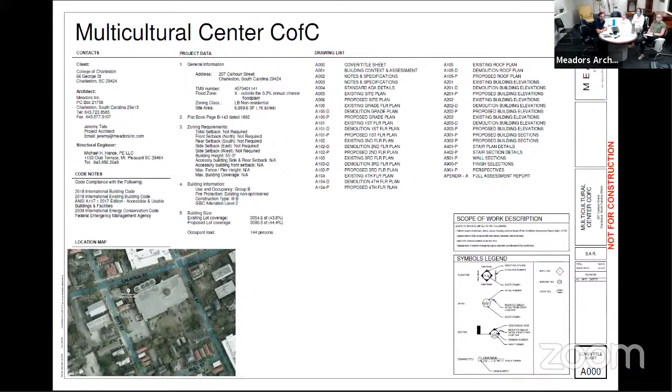Okay, can y'all hear us? Yes, we can. Great. So I'm Jeremy Tate, and I'm joined by Abby Gentry and Brittany Smith from Meadors. Thank you for this opportunity to present this project. Kim, if you could advance the slide, please. And keep going. So we'll start here. As Kim said, the structure was built in 1817, and it remained a residence, including a parsonage, up until the 1960s. Next slide, please.

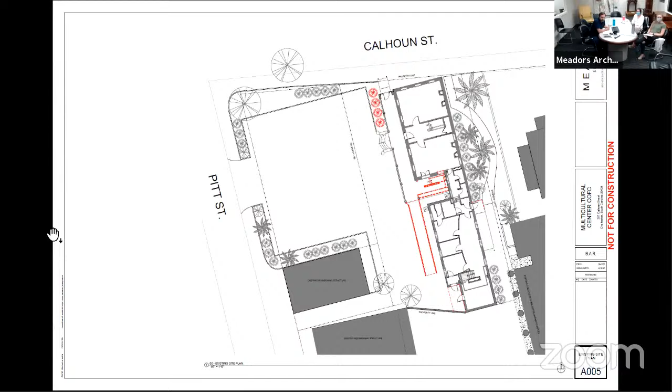Let's just keep going. Next slide. Next. Next. And next. One more. Okay, so the majority of what we are discussing for this presentation today has to do with accessibility and egress improvements to the facility.

As was stated, we have performed a complete conditions assessment. We will correct deficiencies due to lack of maintenance, deferred maintenance on the structure. But the things I wanted to bring to your attention are the improvements to the ADA and egress. So on the east side of the property, which would be the bottom of the plan, there is a current ADA concrete ramp.

It does not have proper railings on either side, so we will be bringing proper guards and railings to that ramp. On Calhoun Street, there are a series of stairs that come up into the Piazza entrance, and they do not contain any handrails for safe access to that Piazza. We'll be proposing to bring guards and rails to that.

And then from the parking lot on the west, which will be the top of the plan onto the Piazza, those curved cheek walls, we are proposing to add guards and rails to that for proper accessibility, keeping the center rail intact. Now, on those three elements, there is a detail sheet we'll get to later, but it's a standard Julius Blum cap with half-inch by half-inch painted steel pickets and a bottom rail. So a very simple railing design.

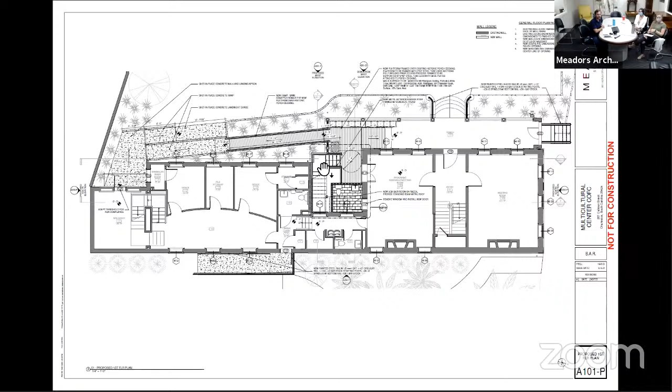And then the new stair would spring up from the western edge here that you see at the top of the page, and as it comes up towards the east, it'll land on the second floor, and it'll follow that same pattern all the way up to the fourth floor. We can quickly advance through the next slide.

Only thing I'm going to touch on here is that as the existing stair progresses vertically, the historic fabric of the second floor Piazza and the roof of the Piazza - it does not exist in its current configuration and hasn't since the mid-1970s. And what it's supported on is not a historic part of the Piazza currently; it's from the 1975 renovation project. So with the placement of this stair, we're not disturbing any historic fabric of the Piazza itself.

This is how it wraps up to the second floor. We do propose at this floor to reconstruct the Piazza flooring and use tongue and groove porch boards sloped to kind of restore that section, and then utilize it for the stairs going up and down.

So then it will reach through the same path up to the third level. And at the third level, the landing will exist behind the Piazza roof that you see illustrated on the top of the page.

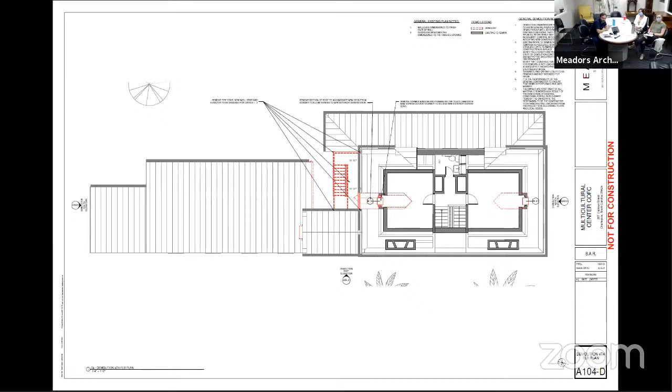It might be better to look at the roof plan next. As this will travel up to the fourth floor, which it currently does not, we're proposing removing a section of the roof south of the existing dormer to create a well for the dormer window to be removed and a door placed. The roof is a copper roof from the 1975-76 renovation. We would reclad that well with copper, and then extend the stair and landing into that well to connect to the door.

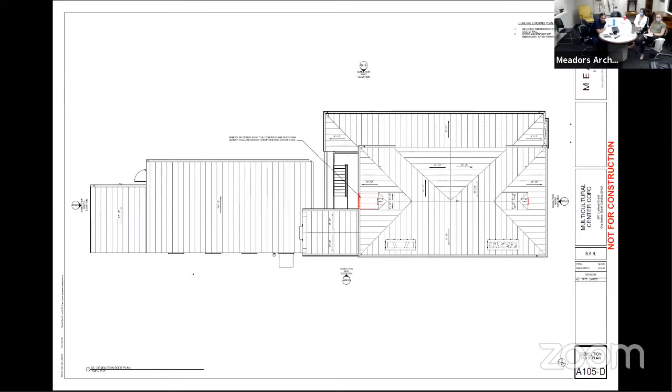This would show how that connects in at that location.

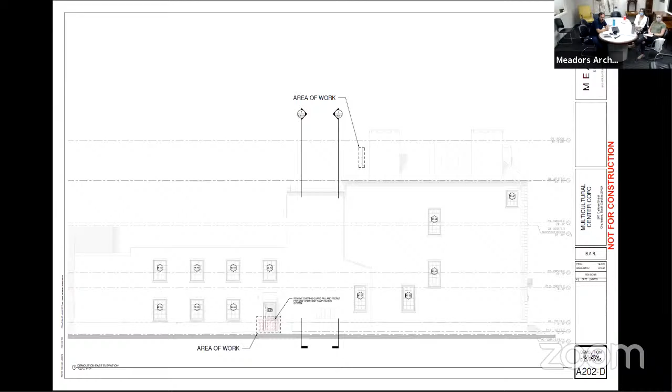It would be slightly visible from the east, but only in a 2D view. The library for the college does block part of this, and from a perspective view it would be hard to see part of this from the east.

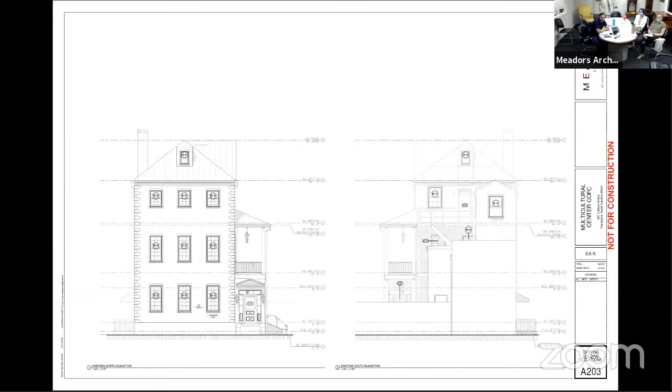It will be visible from the south if you're in the parking lot for the library. You'll see a good portion of it here. This is the proposed view, showing the change up to the door to the dormer.

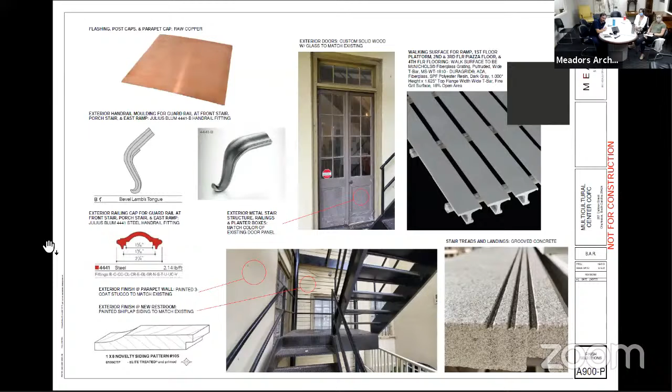And then perspectives. The only thing I'm going to mention in closing is that because of the level of alteration being performed on this building, we're at a level 2 alteration in the IEBC. Per section 805, stories with one exit or access to one exit at the third story above grade plane and higher are not permitted by the code, which is why we're bringing this to you in order to comply with the code and keep the fourth floor habitable for the College of Charleston. We have to have this stair as a second egress up to the dormer.

Thank you, Mr. Tate. Do my fellow board members have any questions for the applicant? I've got a quick one.

Jeremy, did you give any thought to maybe limiting the square footage in that attic space to have it be designated as a mezzanine, or somehow work with the code to avoid having to take that stair up in such a dramatic way?

Yeah, so the code is pretty clear that there's only 4 occupants up there. So when you run the code as a business, because this is College of Charleston, the square footage equals 4 occupants, and there's a restroom up there too. So by the code, I have to treat that as a habitable floor. It's a 4th floor, and I have to have that second stair out.

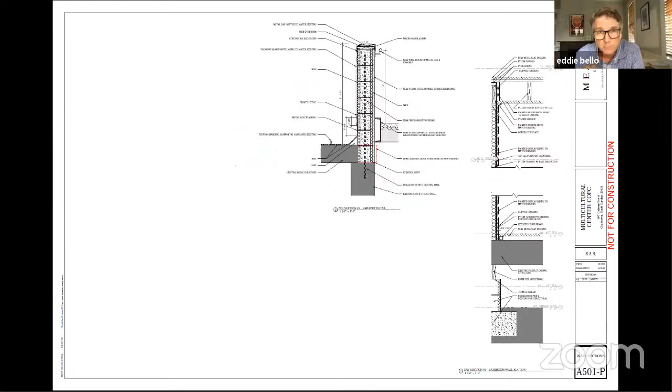Can you go to, well, two quick questions. One, what is the height above grade of the first floor piazza? Is it over 30 inches?

The first floor level is above 30 inches, but there's a step down to the piazza, and the piazza is close to 30 inches. I was just wondering if you had to have horizontal pickets at all.

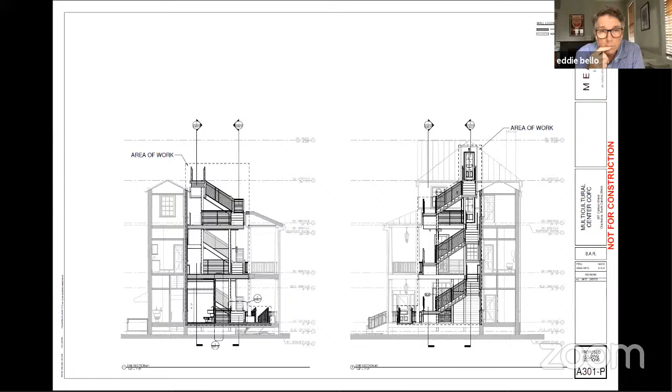Can you go to the enlarged stair plans? This will be the last question, I'm not trying to grill you, I'm just trying to understand it. If you have a floor plan that shows the stair - they're all four on one page coming up. Yeah, that's what I want to see.

I was just going to ask if you looked at - go one more, the floor below would be good. Well, not that one, you had one that showed all this. All right, just stop here.

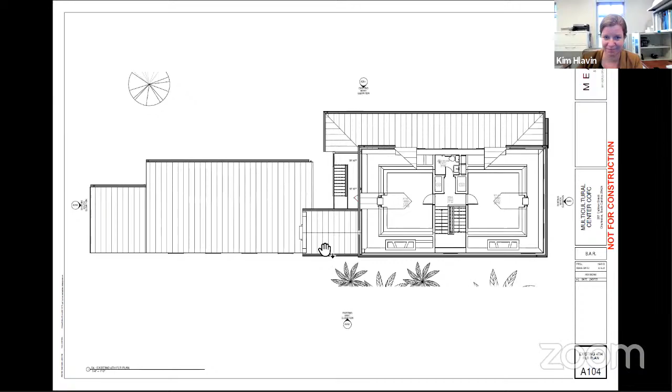This is good. Okay, so right where your hand is, did you look at it - it looks to me like if you took a couple of risers off the south, or a couple of treads off the south, and transferred them over to the right, then the whole stair could go down eastward so it wouldn't be beyond the rear building. You follow what I'm saying? That little corner sticking out - you've got the stair on two sides of it, but three sides, but not the fourth.

And if you put more risers on that side, then the whole stair gets smaller - well, it does in that location. This is at the third level going down to the second level. The height I have to get from first to second has dictated that run while trying to maintain it.

So is this still the third floor? Yeah, you go back. See, is this second floor? This is second floor, yeah.

There's a number of things to factor in. The reason why this stair is starting where it's starting at the second floor and then going down to the first floor is so I have enough height to do that bathroom underneath it. Does that make sense? It does - I figured it was a little more complicated than I was thinking.

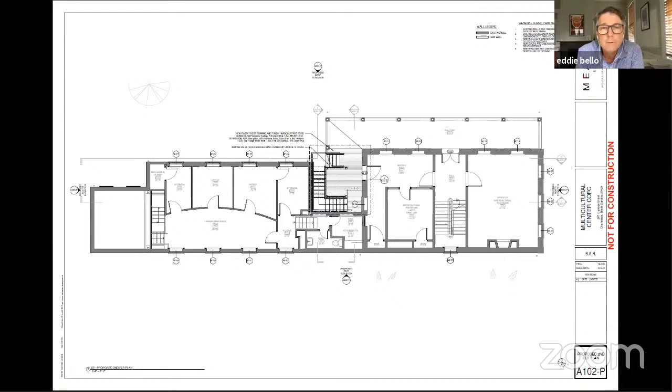It just seems like you've got a little bit more run than you're using. I mean, we're getting into the comments a little bit, but obviously tying into that top floor is what's most visible - that's the big issue. And then also, if you could somehow push it down, but maybe you can't.

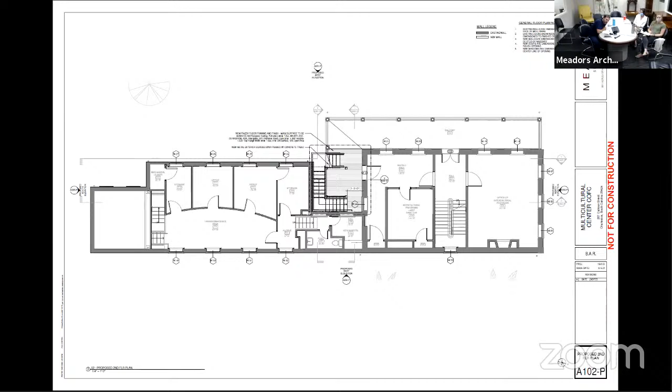I do believe that from the third to the fourth floor, I could probably start the stairs down faster since I'll be getting to that level anyway. That would lower the visibility some. It's a tough one - I just was asking if you looked at it. Sounds like y'all looked at it, so thank you.

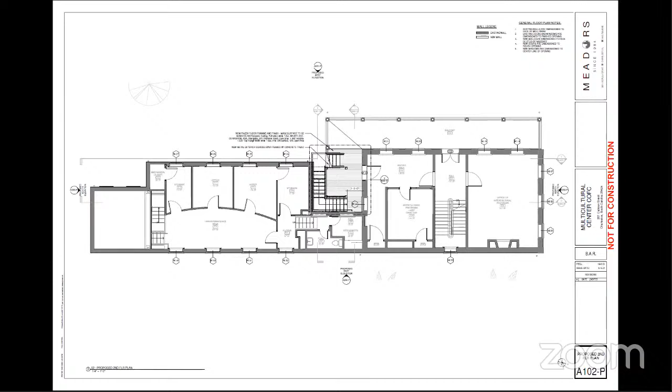This is April Wood, Historic Charleston Foundation. HCF has reviewed the application for preliminary approval for the renovation of the building, including repairs to the windows, doors, stucco, flashing, and roof, and the addition of an exterior ADA access and egress to the fourth floor, and we thank the applicant for their time walking through the application with us. Overall, we are generally supportive of the work. We do have concern about the additional egress to the fourth floor. The alteration removes historic fabric at the dormer and roof, and the additional stair is also highly visible from Pitt Street. While we understand the code requirements for the fire stair, we are concerned about the significant and visible alterations to accommodate the egress stair from the third to the fourth floor, to be on the record. We hope a more sensitive solution can be found. Thank you.

Thank you, April. Kim, do we have anyone else speaking from the public? We have Virginia Swift with Preservation Society. Virginia, you're on mute. Hi, good evening, can you all hear me? Hi there. My colleagues weren't able to make it, so I will be submitting comments for the Preservation Society - my name is Virginia Swift.

The Preservation Society appreciates the applicant reaching out to us on this request. This is an early and significant Category 2 building, and we are encouraged by this proposal to conduct much needed maintenance and repairs to prolong the life of the building.

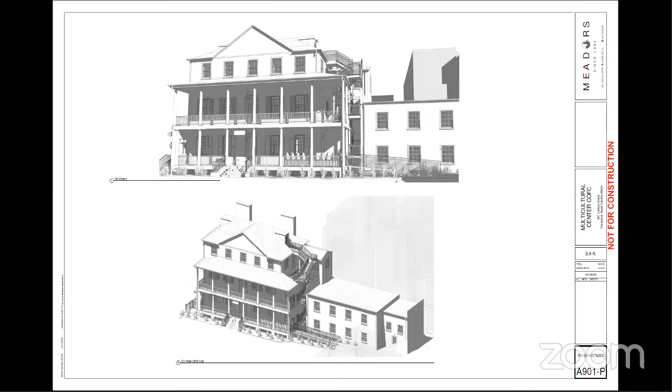However, we are not supportive of the introduction of an exterior egress stair that extends up to the fourth floor. As proposed, this structure will be highly visible and intrusive to existing historic fabric. We ask that alternative configurations be explored that are more sensitive to the form and fabric of the historic building, and in particular, the Piazza. The Preservation Society is sympathetic to the programmatic needs of the college and remains optimistic that a compromise can be reached that facilitates project objectives as well as preservation of the significant historic building. Thank you.

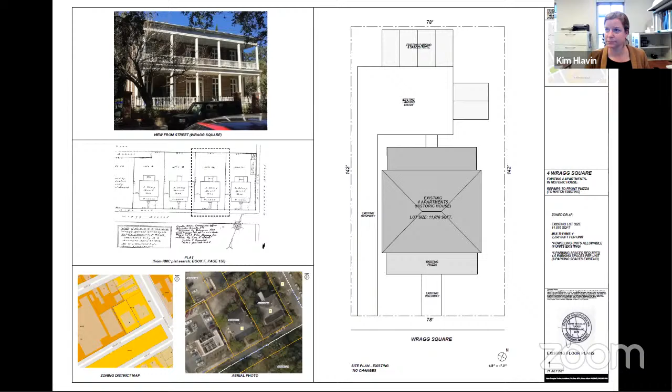Got him. Mr. Tucker, I see you, but you're on mute. Okay, sorry about that. This is Johnny Tucker, the architect. Had a little confusion there. So I'm representing the owner of the house, Edouard DeFranc.

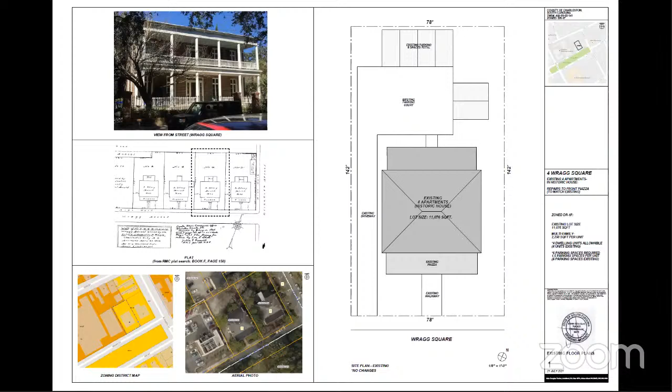So this is, you probably know these houses. These were part of the 7 days of the week that were built for the Aiken-Rhett house. This is the second house to the west of Elizabeth Street. Existing, it's a 4 unit apartment building. The owner actually occupies the top 2 units. If you could go to the next slide, please.

And it's masonry with a stone flooring. It's sort of interesting that the stone is matched from the walkway. All of it is in pretty dire condition. We're going to obviously remove that pretty horrible metal railing. Fortunately, we don't need railing, so we'll eliminate that completely. Next slide, please.

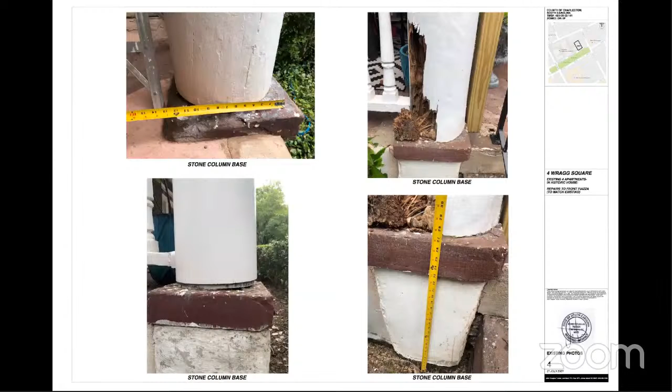Next slide, please. So close up of some other column conditions. I like that lower left-hand corner photograph, you can see that is most definitely not a historic wood column. Some of the others, like this one in the upper right, appear to be. I don't have a full inventory of each column, but we feel like a majority, if not all of the columns at the first floor piazza are probably in a pretty dire condition.

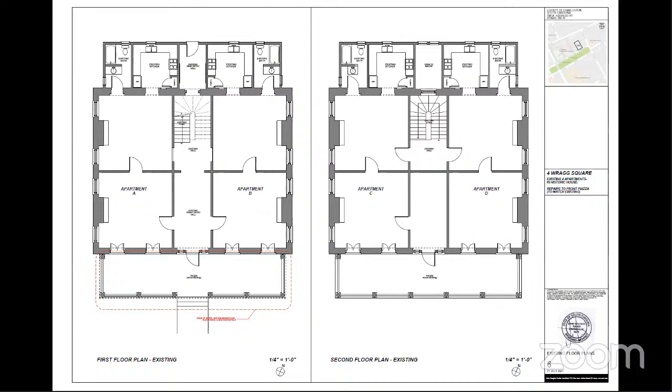So the area in question, again, first floor piazza. Ideally, what we're hoping to do is just replace the existing foundation with a new one, but since we're having all the settlement of the piazza, with a new concrete foundation and CMU, but treat it so that the finished view will be stuccoed and exactly identical in appearance, except for, and you can see it on the upper details.

So the problem with the existing flooring is it does not extend beyond the stucco, which I pointed out before. So the proposal is to, with the new stone flooring, have the floor extend approximately 3/4 inches over the face of the stucco, which will allow for a drip edge.

And obviously we maintain the stone plinths or bases for all the columns, and maintain as much of the railing and pickets, ideally all of them. With replacing columns, obviously they'd probably have to be removed, but replaced. So really, the following sheets are just showing the structural drawings of how we would do this, shown in my details as well. The block walls and the concrete slab will be the substrate for the new stone flooring.

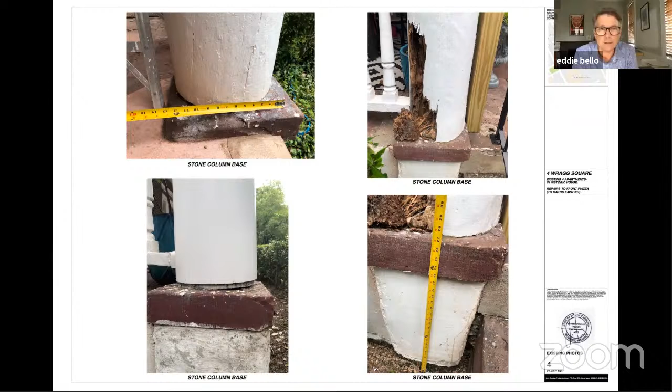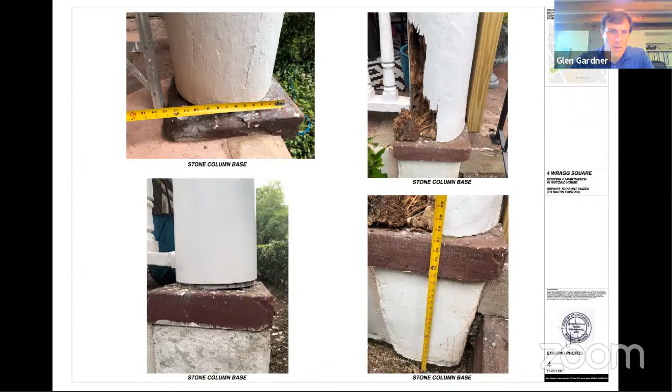Go ahead, Glenn. Sorry, just one clarification, Johnny—I think you kind of said it verbally, but on sheet 7, your detail, the pickets are just sort of drawn as generic. I'm just verifying that there are notes that those would be the existing pickets reused, and then replaced only to match that profile as needed. Yeah, sorry, that was me in a rush. No, that's under the assumption we're not going to have to replace any of the pickets. I just did that as a placeholder, but the note is correct, and we would not be changing the picket profile.

Okay, hopefully not changing the pickets themselves—they look to be in pretty good condition from a look from the sidewalk. The entire piazza above the stone bases, and of course the columns, are in trouble because of wicking, but the pickets upward on the second floor piazza are in surprisingly pristine condition.

Thank you. I had one question, I guess it might relate a little to Eddie's question about the condition at the column bases. Do you have any sense of how old, how original this current paving is, this condition is? That's a good question, Julia.

I should have included photographs of number 2 Wragg Square. It's got masonry too, but some sort of nebulous conditions also. Yeah, it actually looks like they poured a topping slab over the condition. I probably should have included that just so you could see that condition. Unfortunately I've only found one photograph—I can't even remember the source—but it's showing like 4 of the days of the week. The last 2 are just, I think, from the 50s, and none of them have any—I can't tell. I mean, I see the little relief where the column bases are proud of the main foundation wall, but no condition, I can't see any detail on how it's treated.

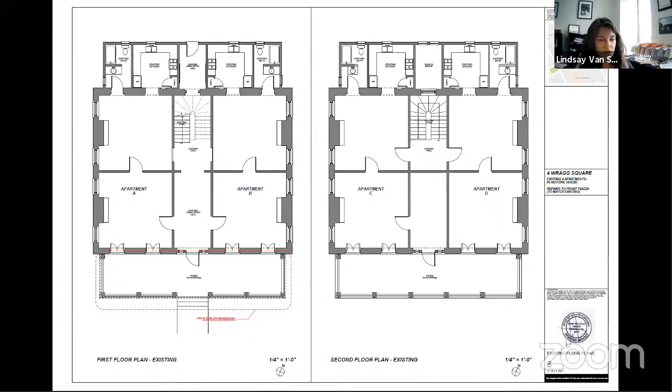Thank you, Kim. Mr. Tucker, did you want to clarify or respond to anything raised by the public or staff comments? No, thank you. All right, let's move into board discussion and a vote.

I would say I live right near this application, and I've looked in the past, especially as the school to the west of this home had some proposals in recent years. I have never seen any photographs of the homes that were unfortunately lost there, or the two homes that remain, having a piazza floor that was not masonry. It's so atypical, it's just downright weird, to be honest, but I've never seen anything that proved otherwise.

They seem to have both been very similarly built at some point, whether it's original to the construction or not. I think that the brownstone flooring is historic at this point, but I'm in complete support of what has been requested. I think that little bit of a drip edge is reasonable to request, maybe minimize it a tad. But I think having the face of that stucco come up flush with the brownstone, especially with that brownstone not being perfectly even on the edge, is a reasonable ask. I think the owner of this property has been a good steward of historic properties in the past, and I'm glad they're trying to keep this piazza upright.

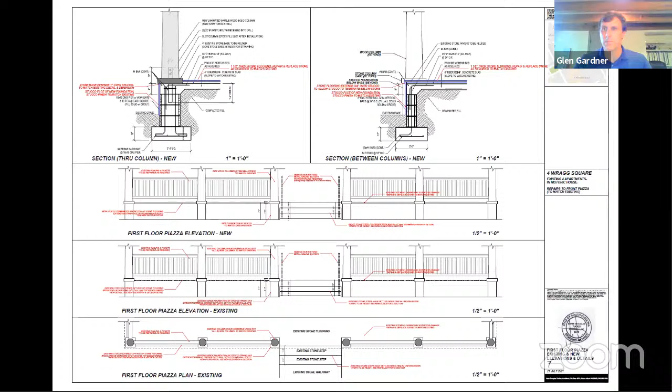All right, do we have a second? Motion on the floor for final approval, with a board comment to coordinate with staff on stone replacement if required. Glen, did I hear a second from you? I think Eddie did. Yeah, it was me. All right, Eddie, second. I'll put it to a vote.

Fillmore, yay in favor. Glen, yay in favor. Julia, yay in favor. Eddie, yay in favor. The chair votes with the majority and the motion passes unanimously.

Thank you, Mr. Tucker. Thank you. You're on agenda item number 4, 58 Hanover Street. Kim? Don't go anywhere, Johnny. I'm here. 58 Hanover Street is requesting preliminary approval for new construction.

It's in the East Side neighborhood in the Old City District. Here's an aerial to familiarize yourself. It's just north of Columbus on the east side, and you can see the vacant lot here. This is from Aiken Street, looking north on Hanover, and looking south. With that said, I'll turn it over to Johnny.

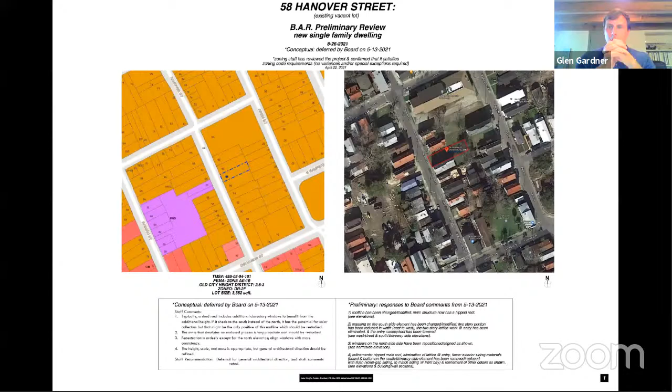Thank you, Kim. So again, Johnny Tucker, architect. I was in front of the board in May, and we were deferred. I will address the comments and our response to those when we get to the elevations, because that's obviously where the changes occurred. So next slide, please.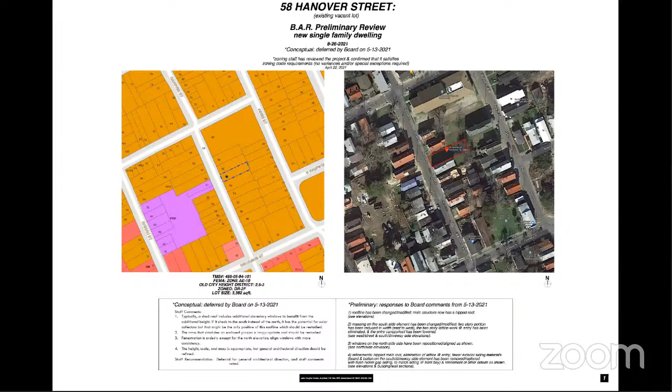Next. So just more site photos. Next, please.

And then across the street, the red dotted line is the massing of the proposed structure.

Okay, so the proposed changes, I'll get into in a little more detail, but this is where you can sort of see the main change. So the conceptual design that was brought in May, there was a lot of unease with the shed roof. So we have restudied that and we're proposing a hip roof. And we've also sort of reworked the other elements. I'll get into those when we get to the larger elevation.

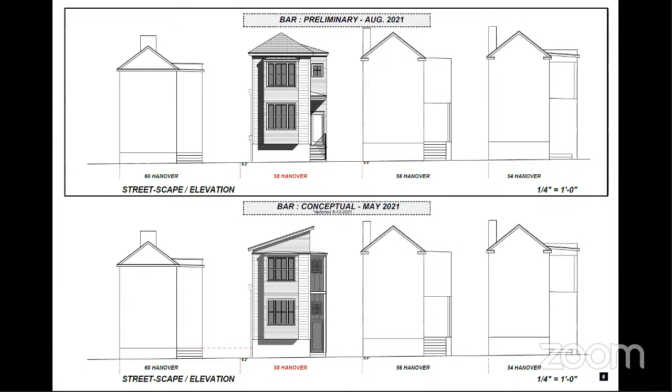So I'll go through these pretty quickly. These are just the new floor plans, which are really not much different than the previous floor plans.

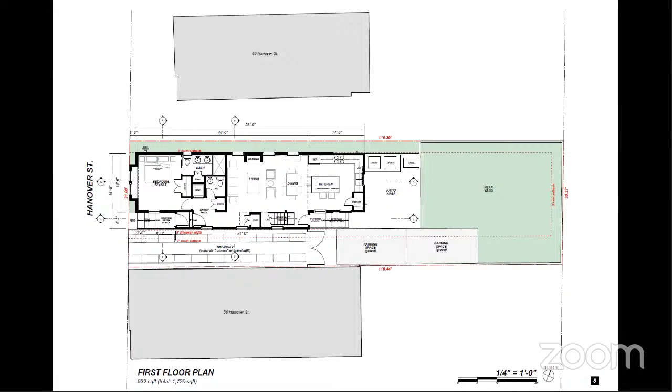So the floor plans are almost identical. There is a reworking of the front entry area, which you'll see in the elevations coming up.

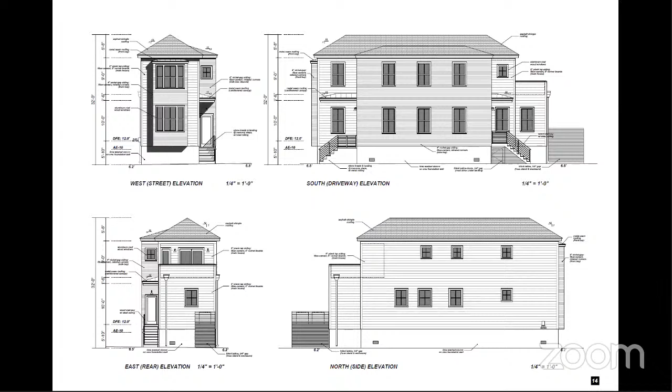Okay, so those are the four proposed elevations. And I guess go to the next one, and I'll go over the changes that were made relative to the staff comments.

Okay, so the first comment that I think I've already touched on was the shed roof. I feel like the hipped roof is a much more refined solution. What we've done is the side element on the south side, I've let that roof line engage so that has a hipped roof as well. You can sort of see that at the top west elevation, obviously the south elevation.

And then another element that we have changed, or revisited completely, was the trellised piazza entry element on the lower south elevation that we brought in May. I did a lot of study about that, and I just decided it was causing a little more grief than it was rewarding. So we've decided to simplify that.

And by doing so, we've lowered the front entry roof line to another hipped element that has metal roofing, which is sort of nice. And the front bay element is very similar to the previous proposal, but refined and also with the metal roofing.

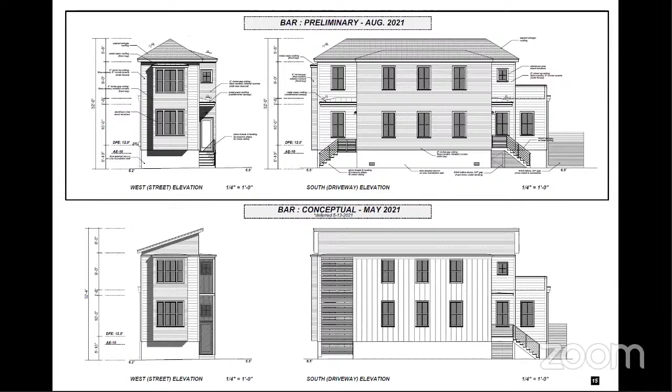Next slide, please. And then I'll go through these real quick, half inch scale elevations. We've also, I forgot about this too, reduced the number of siding materials, and I'll get to that.

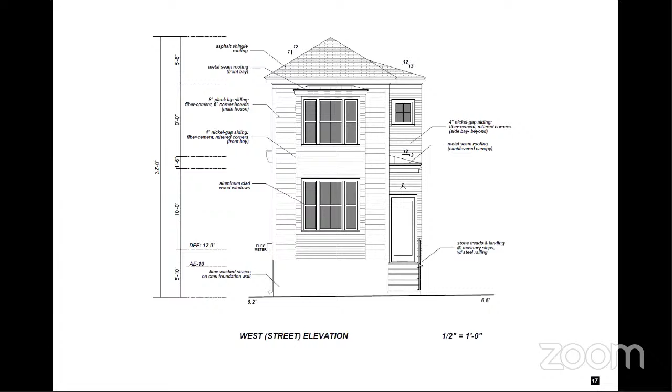I believe, yeah, we had a vertical board and batten on the side element, so we actually had three main building materials: the lap, the ship lap, and this board and batten. So we've reduced that.

And then so now we just have the two elements, which you'll see in the upcoming image. Next, please.

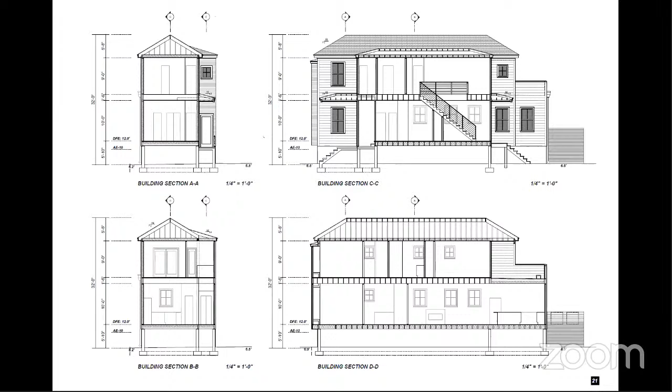It's a simple house on the east side, simple materials, but I think with the mitered corners and some of the simple materials, the cove molding gives a nice shadow line and profile, but it's a quieter profile. Next, please. Okay, that's perfect, almost done. Next, please.

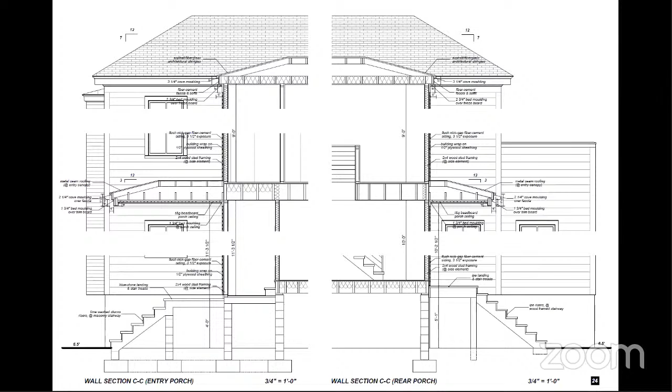And there's the engaged roof piazza in the back. Sorry, not piazza—roof terrace. We talked about it in the last meeting. Next, please.

And next. Oh yeah, here's the building materials to remind everybody. Just simple—let me put my glasses on. 5/8 inch plank lap siding for the main body of the house. The flush nickel gap with mitered corners for the front element and side element. Architectural shingles for the main roof element. 5V crimp for the metal areas, lime wash stucco, and then the steel railing at the front entry. Next slide, and then I'm done.

Just the streetscape one more time. So thank you, Mr. Tucker. Do my fellow board members have any questions for Mr. Tucker?

I do not. All right.

Kim, do we have any public comment? I did not see any in the Dropbox. Good question—we don't have any public comment.

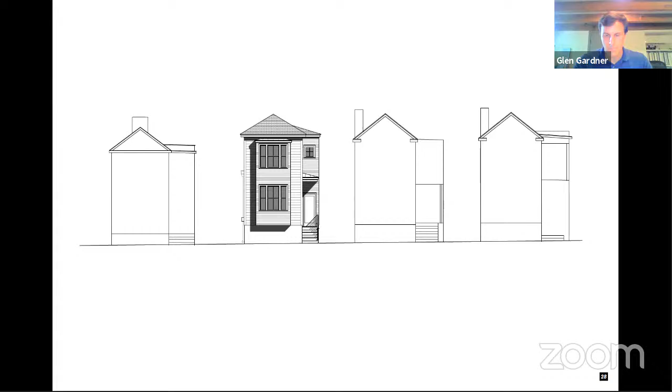All right, so we had a motion on the floor for final approval by Eddie, and a second by Julia. I will put it to a vote. Fillmore, yay in favor. Glen, yay in favor. Eddie, yay in favor. Julia, yay in favor. Chair votes as majority, and the motion passes unanimously.

Thank you, Mr. Tucker—a big thank you for you. Thanks a lot.

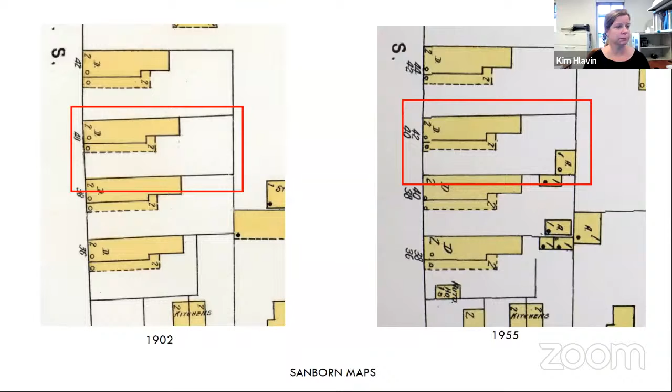Here are some existing site images, looking north on Legare and south, and some Sanborn maps from 1902 and 1955. With that said, I'll turn it over to Ms. Jennings, and the floor is yours whenever you're ready.

Ms. Jennings, I can see you, but I can't hear you. Does she have an audio problem? Is she dialed in and also on video? Kim, you're muted. She's raised her hand, but I can't do anything else. Ms. Jennings, have you tried speaking? What was that, Lindsay? I didn't know if she tried speaking. Can she just call? If we're having audio problems, we can put this on the table and go to the next one until we figure this out.

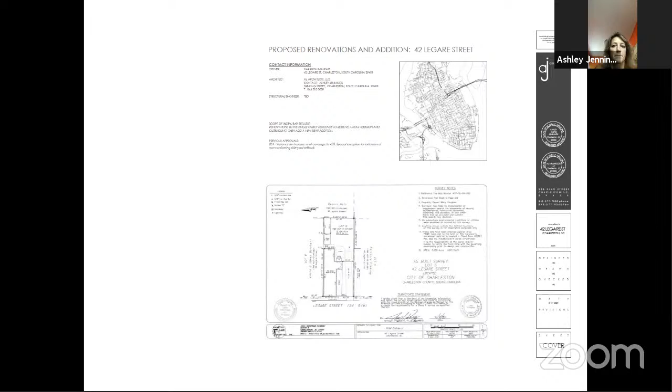It might not be working again. Can you hear us, Ashley? I can hear you. Can you hear me? Yes, we can, you can go ahead. Okay, great. Ready? Yes, you have the floor. Ashley, you have the floor if you're ready. Okay, am I just going to present it, or is Kim going to introduce the project? Oh, I'm sorry, she did already. I think you missed it. Okay, sorry, I was in the process of trying to get back on. Okay, so my apologies, I don't know what happened with my computer.

This is an existing single house. It's been a family home for about a generation, and it was recently sold. The new owner would like to make some repairs and renovations. The family lived there and enjoyed the house for a long time, and it needs some renovations now.

Okay, next slide please. Okay, sorry about that. So on the site plan, you can see that this is the addition that's there now that we're proposing to remove.

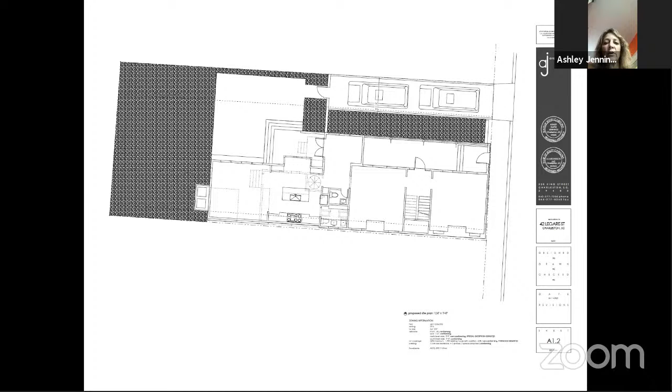Next slide please. And the proposal is to... sorry. So here you can see the proposal for the first floor being a kitchen and a living space. Next slide please.

On the second floor, we're looking at a master suite. As y'all know, with every single house there's a challenge to access rooms. So the idea is to ever so slightly modify the rear room to create a hallway and then make a master suite on the back of the house. Next slide please.

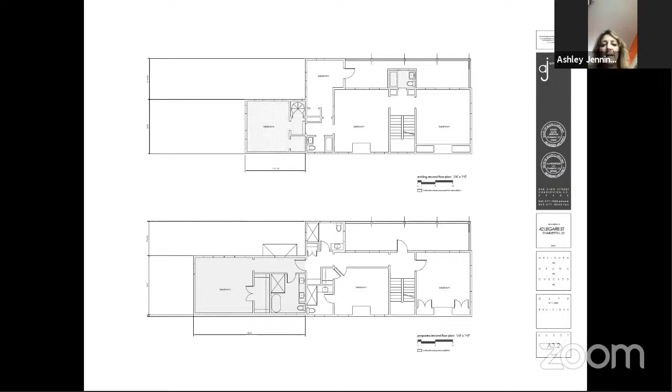So there's very minimal changes to the street elevation except for the removal of that second floor infill. Next slide.

On the south side, the idea is to use an existing pause in the building where the piazza at one point returned and create the addition behind that pause, opening that side up for some glass and a view of the yard itself. Next slide, please.

And here you can see that break in the facade as we propose with the new addition. Next slide, please.

Ashley, I think you're frozen. Ashley, can you hear us? I can hear you, can you hear me? Yes, we can hear you.

And then the idea is to create a very simple addition in the back. And that's all I needed to say.

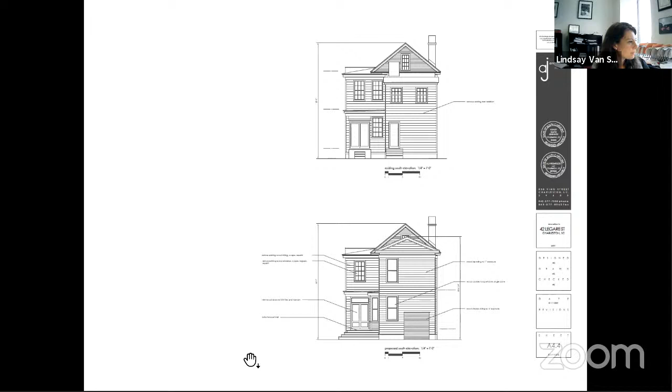Thank you, thanks Ashley. Do we have any board questions for the applicant? All right, Kim, do we have any public comment? We don't.

All right, if you will give us staff comments, please. Sure. We really appreciate the differentiation of materials and the separation of roof lines that delineate two very distinct building campaigns. Normally we'd recommend recessing the addition further on the driveway side and reducing the size of the openings to be more compatible with the primary house. However, the addition at the rear of the piazza conceals these elements. One other thing, we have approved the demolition request at the staff level, and staff is recommending conceptual approval with final details to staff.

Thank you, Kim. Ashley, did you want to clarify or respond to anything raised in the staff comments? No, thank you. All right, now I'll open it up for board discussion and a vote.

I agree, it seems reasonable and appropriate. And I just had one tiny suggestion where those stairs from the terrace sort of spill out toward the driveway. If you wanted to, you could kind of wrap those around toward the street and hopefully avoid a rail that would be required projecting out toward the driveway. You know what I mean? If you just sort of let them wrap around instead of the blunt end of them sticking out toward the driveway, then you could put a rail on the wall or avoid that awkward condition of the end of those steps, if that makes sense.

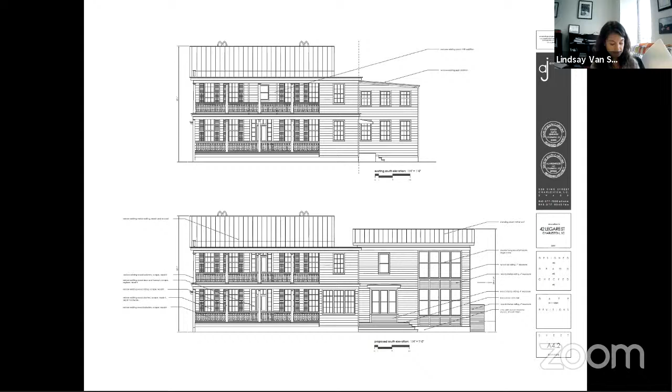Julia? Yay, in favor. Fillmore? Yay, in favor. Eddie? Yay, in favor. Glenn? Yay, in favor. Chair votes with the majority and the motion passes unanimously.

Thank you, Ms. Jennings. Thank y'all. Sorry for my technicals. Hope your dog's okay. It isn't too angry.

All right, moving on to agenda item number 6, 22 Savage Street. Kim, please give us an introduction. Thanks, Lindsay.

All right, 22 Savage Street is requesting conceptual approval for the new construction of a single-car garage. The building itself is a Category 4 in the Charleston neighborhood and was built sometime around 1890 in the Old and Historic District.

Whenever you're ready, you have the floor. Hi, this is Jenny Conlon. Bear with me, I have two Zooms running, so I'm getting a little confused. What we're trying to do is add a garage where a shed stood originally.

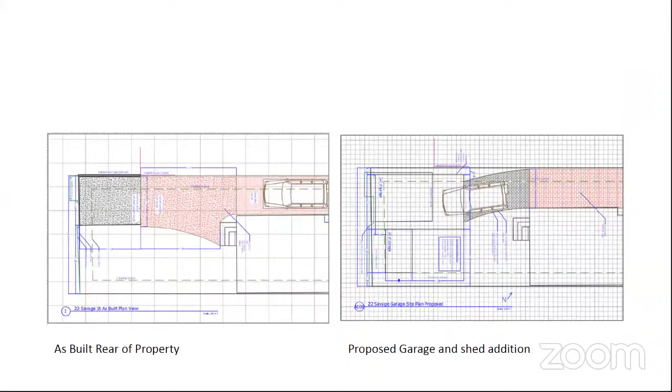Questions. Is there an image, and maybe I'm missing something, of the new building next to the existing building? Is it not visible? I'm confused about this application. There are elevations, I don't see where they are on here, but there were elevations. This was the only thing I had. Oh, in the Dropbox, Kim, there were elevations. There you go. I don't have any elevations of the existing house or a complete site plan. So correct.

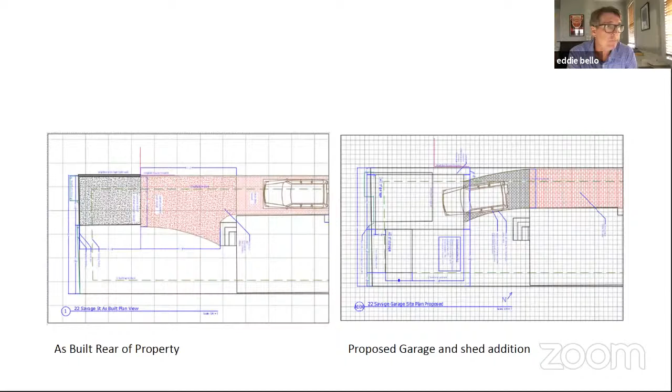Well, off the top of my head, my guess is a garage is probably okay, but it's really hard if I don't have a whole site plan to know where it's going. So it's hard to know what we're reviewing. I mean, again, it's probably fine, but I just don't feel super comfortable without a site plan to the street. There's one in here, I'm scrolling through her drawing now. And my guess is it's minimally visible, but I just think we need a real site plan.

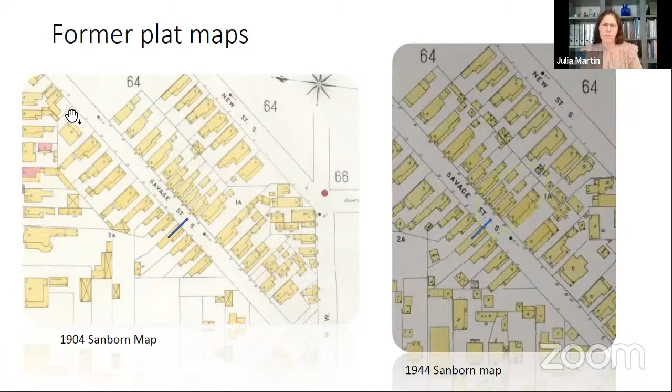Julia, to answer your question, it's in AE 11. Okay, we don't really know what the grade is or anything, but so whatever. Any other board questions at this time? All right, I'll move on to public comment.

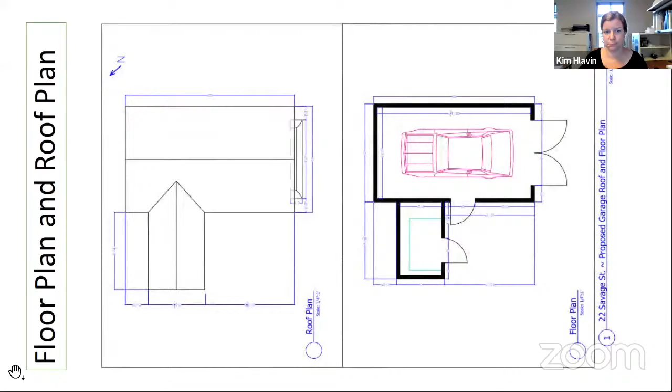Kim, do we have anyone speaking from the public? I don't see anything in Dropbox. We do not. All right, if you will give us city staff comments and recommendations, please.

The houses are very close together, which eliminates any line of sight except directly down the driveway. If it were to be visible, we would suggest expanding the garden shed portion of the garage to the rear to eliminate an awkward massing. Eliminate the boxed eaves. HardiePlank isn't appropriate as the Artisan line has been discontinued, so submit an appropriate replacement at final review, and also submit engineering drawings for final review. Otherwise, we are comfortable recommending conceptual approval with final details to staff.

Thank you, Kim. Ms. Conlon, did you want to respond or clarify anything raised in staff comments? Yes, I have been trying. This is, of course, my first submittal in quite some time, so I was trying to get some help with this, trying to get the packet together. I guess the staff is super busy, which I understand, I'm super busy too. So anyway, I've been requesting a review to make sure I have everything I need on this, and I've missed that site plan, so I apologize for that.

Thank you, Ms. Conlon. I'll open it up for board discussion and a vote at this time. I can start, and along the lines of where Eddie was going, I think there's a lot of unclear or missing information here. My inclination is that the height, scale, mass, and general architectural direction are okay, but currently the details, the site conditions, the flood zone, materials, and a lot of things are just sort of missing and nebulous. I'd be happy if staff wants to take it from here, but I just feel like they're going to need a lot of clarification before they can give a final approval. Yeah, that's all I got.

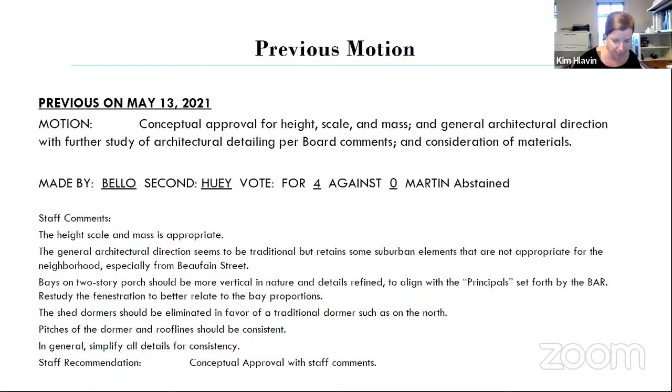Hey guys, can you hear me? You can. All right.

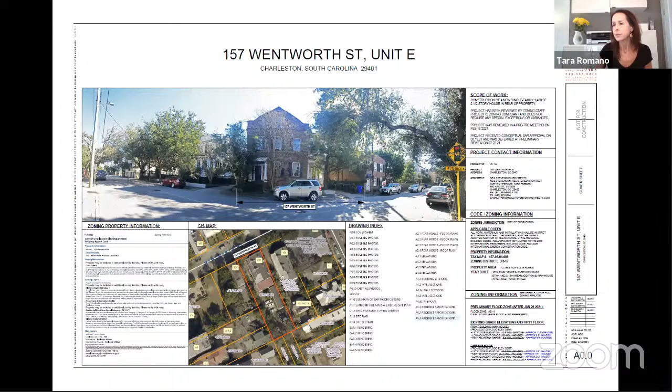Okay, so let's see. I'm going to try to run through some of these photographs quickly. You might remember this one. I guess you can go ahead and go to the next slide.

So 157 Wentworth Street is on the south side of Wentworth. There's the main building there, 1853, the carriage house behind it, and then there's a decent amount of space left in the rear of the lot. Next slide.

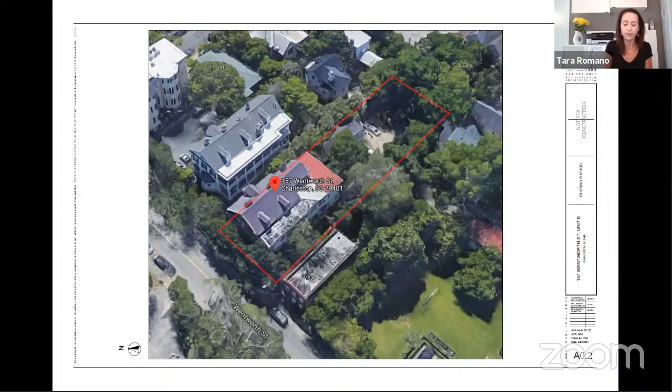Same there, that's looking in the other direction. You can see the empty space available in the back. Next slide.

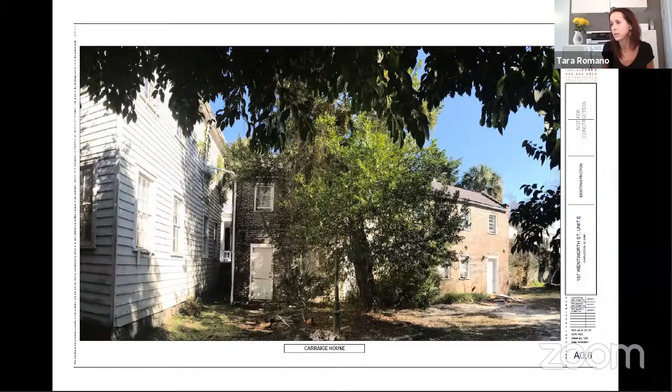And the carriage house behind it. The new structure is going to go behind this carriage house.

It's a view from the back looking forward. You can see the carriage house in the foreground and then the main house, which is 3 stories rising up in the back.

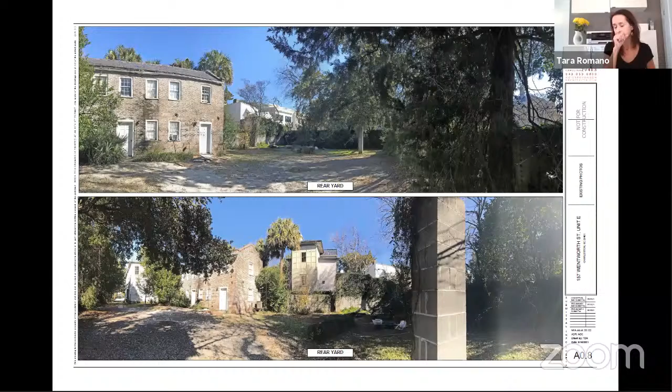And the rear yard area, that big clearing behind the carriage house, is where a new house will go. If you look at the picture on the bottom, the new house will be in alignment with the house you see in the back on that adjacent property. The new house will be smaller than that house.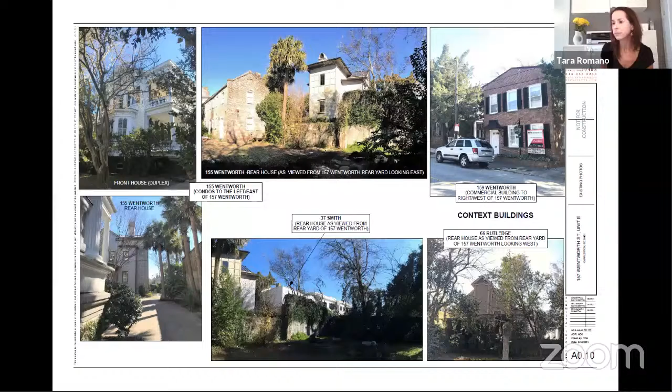The response is that the sloped columns were eliminated. Staff comment 2 noted other items giving the design a suburban feel: bulky trim, heavy columns, and extraneous trim on the dormers, to be refined by reducing or eliminating. Our response was we slimmed down the dormers to remove the extra trim. The window and gable trim was changed from 6 inches to 4 inches. The columns were slimmed down from 8 inches to 6 inches square, with top and bottom trim removed. The angled columns were straightened, cable rails changed back to clean line, square pickets and squared off rails, and the upper horizontal trim band was changed to a traditional gable trim line.

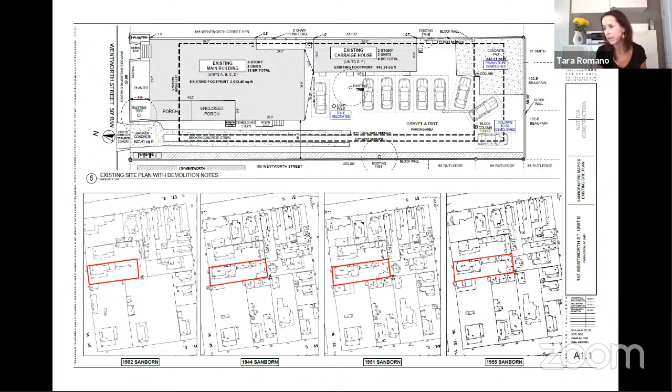Next slide. Romano, you've got about 2 minutes left. Man, she's so bad at that. I thought I was going fast.

Area plan is the same. You can see at the top, kind of mimicking the building above. Zoning is the same.

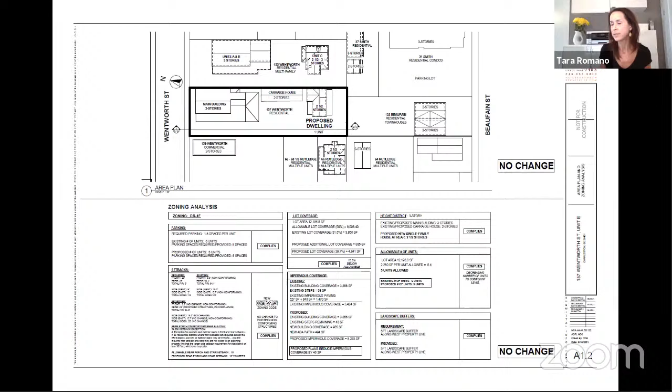Site sections: at the top is the previous, more contemporary looking building. At the bottom is the new one proposed. You can see the floor-to-floors that we reduced, and the 1 foot taken off the building.

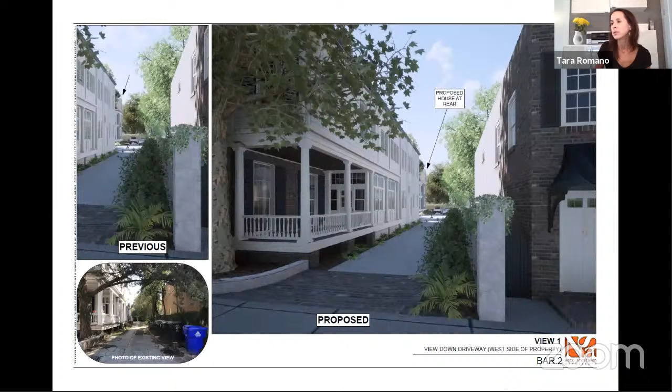This is the view from Wentworth Street.

View from the neighbor's driveway. You can see in the previous and proposed here that it's shorter. It's 152 feet back.

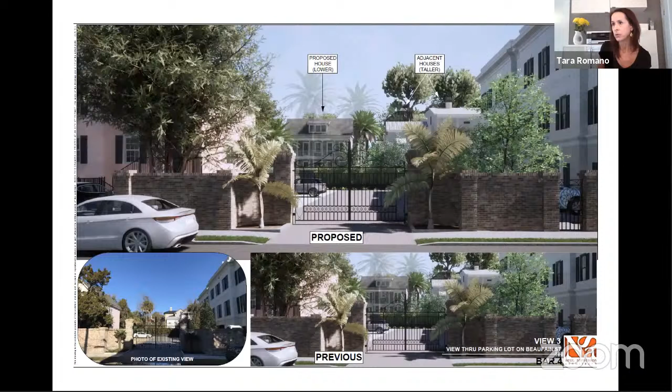The rear view shows the more vertical proportions of the back.

This is the new rendering. It's not really a BAR item right away, but it shows the cleaner lines and more traditional look that we brought it back to.

Previous and proposed, we just did light modifications to respond to the new doors and windows on the back.

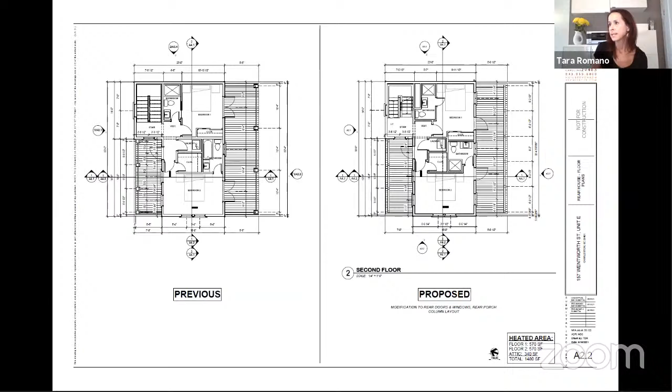Minor modifications there. It got a little smaller up there.

Not much change there.

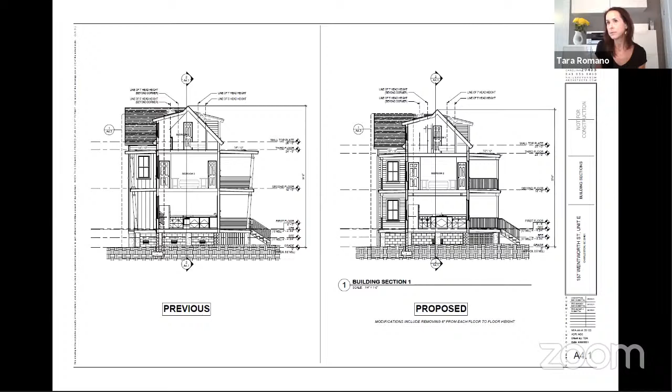These are just previous and proposed building sections.

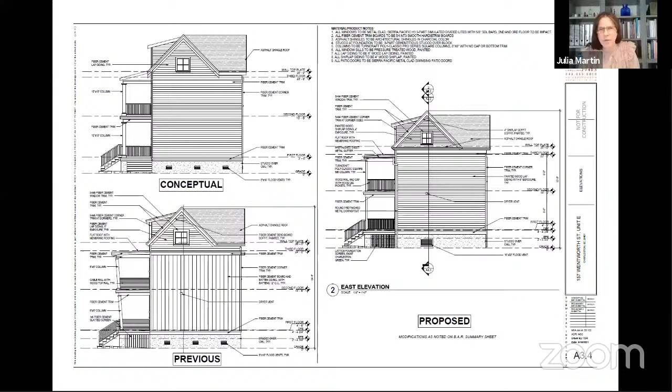Hey, Lindsay, I apologize, I had one quick question for Tara. Go ahead. The overhang on that shed dormer is really wide. I was curious, if you look at the front elevation, whether that was an intentional design move. You know, I've kind of thought that too.

I just end up having so many comments sometimes for the drafts person that I might have let that one go, but I would agree with you. I think that could be slimmed up a little bit. Cool, thank you.

Oh, is this board discussion, right? Yep, now on board discussion. I don't really have anything else to say on this one. I think they followed the directives we gave them pretty well.

I would go ahead and move for final approval unless anybody else wants to say anything. No, I agree with the dormer comment about the overhang of the eaves on the rake side. Well, we have a motion on the floor for final approval.

Julie, did you have something? Let me just add that board comment in, since everybody agrees, to reduce the overhang on the shed dormers, plural, I assume.

So we have a motion on the floor for final approval with a board comment to reduce the width of those shed dormers' eave overhang. Do I have a second?

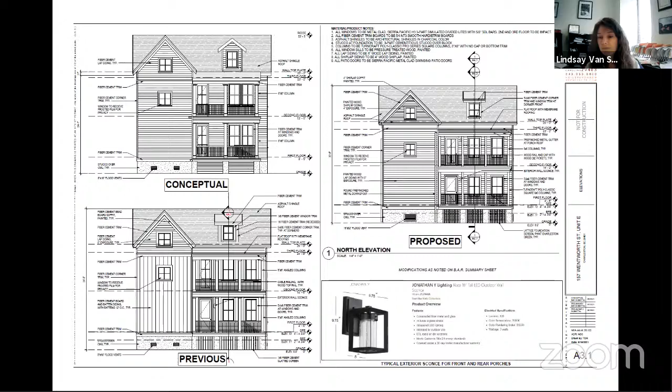Agenda item number 9, 127 Smith Street was withdrawn by staff. We are on the final agenda item, number 10, 49 South Battery.

Kim, if you'll give us an introduction please. 49 South Battery is requesting final approval for slate roof replacement in like kind. The building is category 2 in the Charlestown neighborhood and was built in 1795. It's in the Old and Historic District.